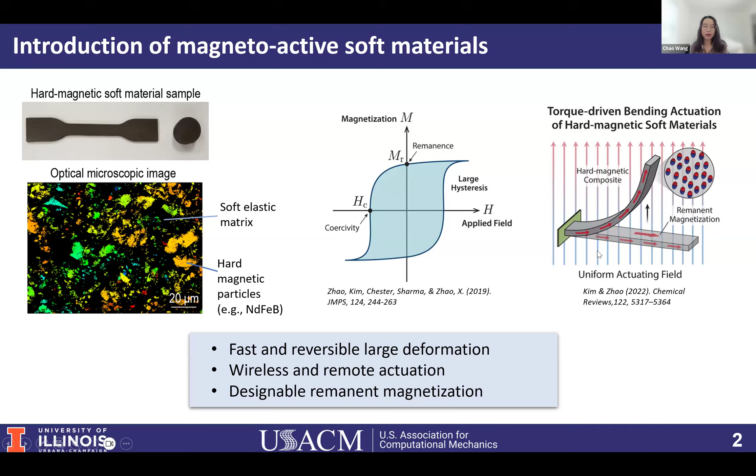Some advantages: first, it can have a very fast and reversible large deformation. Also, we can apply the magnetic field wirelessly. And lastly, the magnetization can allow us to design its distribution so that we can manipulate the mechanical response.

Because of those advantages, there are many interesting applications using this material. For example, as shown here, they designed some robots moving in a stomach model. In this work, they designed this robotic bar so it can navigate inside the vascular network to do some interesting tasks. And in this work, they designed some metamaterial for wave control applications.

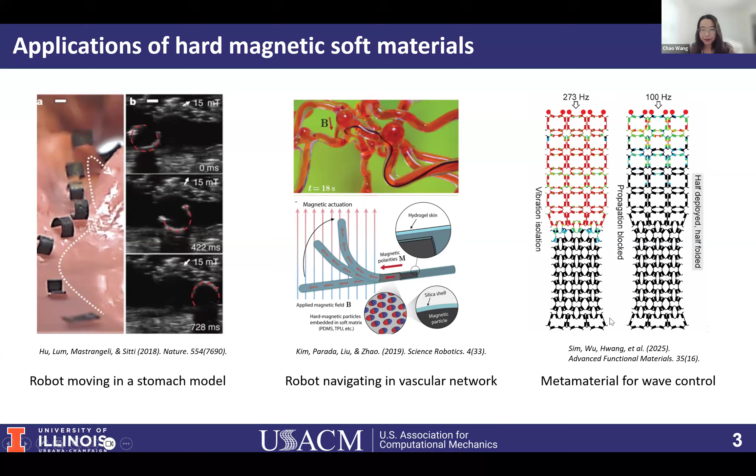Based on that, my research work is investigating a framework integrating design and advanced manufacturing methods to fabricate those designs. Finally, we are also investigating the potential applications using this fabricated design. In the next part of this talk, I will introduce them one by one.

So first, let's start with the modeling and design part. In terms of the modeling of this hard magnetic soft material, we adopted this simplified model published in JMPS in 2019. This model describes the Helmholtz free energy function in two parts.

The first part is the hyperelastic stored energy function to describe the nonlinear elastic property. And the second part is the magnetic free energy. So there are some key assumptions of this model: it assumes the material retains a remnant magnetization after saturation, and in the undeformed configuration, it assumes the magnetic flux density varies linearly with applied field. Lastly, the applied magnetic field is assumed to be uniform.

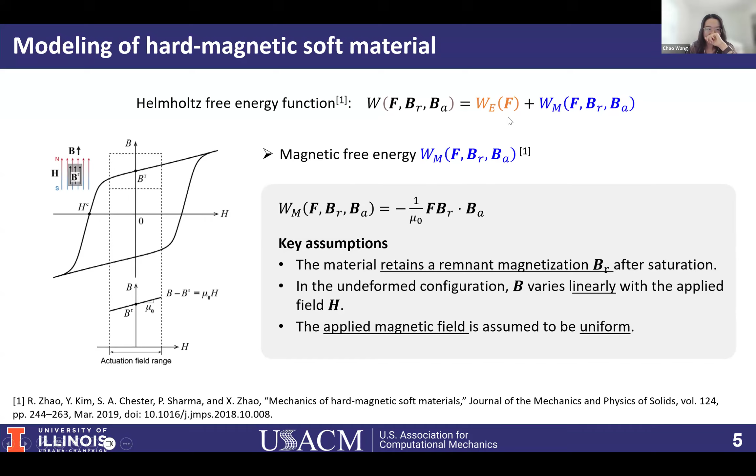Using this model allows us to deal with the high computational expense of topology optimization. In terms of the first part, the hyperelastic energy function, I'd like to point out that in the original model, they assume the material is homogeneous.

However, the material is essentially a two-phase material, including the rigid particle and the soft elastomer. To address this assumption, in our recently published work, we adopt an analytical homogenization-based model originally developed for filled elastomers, and we are investigating its application in the hard magnetic soft materials.

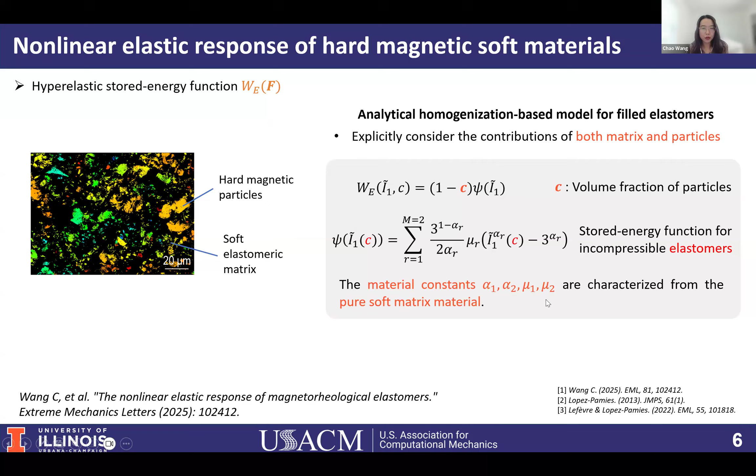Basically, in this model, it describes the energy function with respect to the volume fraction of the particles. The stored energy function can be for incompressible elastomers, and the material constants are characterized from the pure soft matrix material. So it explicitly considers the contribution of both the matrix and particles.

The key advantage of this model is that we can just use one-time characterization of the matrix material. It allows us to predict the mechanical response of the magnetic materials at any filler volume fractions.

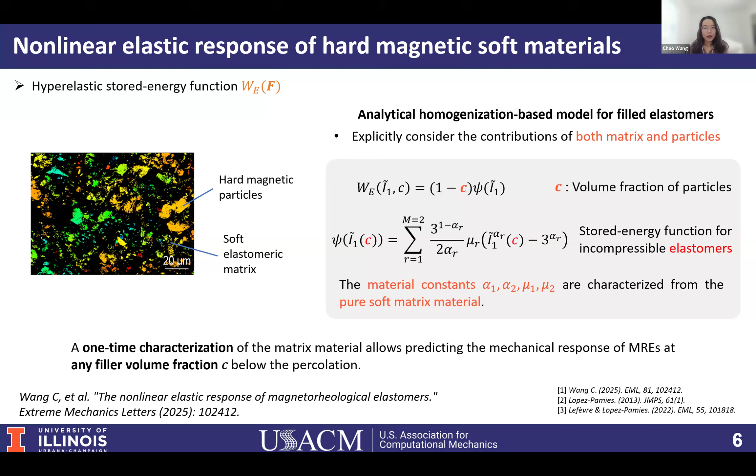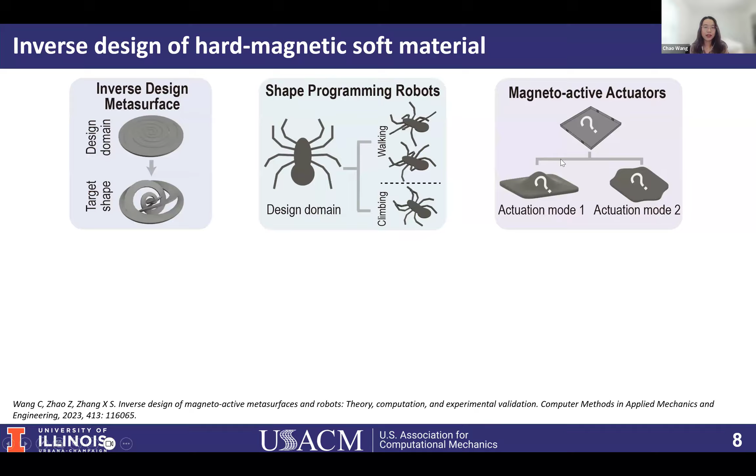Based on this model combined with the previously introduced magnetic potential energy, we use it for the inverse design of hard magnetic soft material. Here we consider different functionalities. For example, we can inverse design a metasurface to achieve different shapes, design a robot with different locomotions, or actuators with different actuation modes. To achieve that, we mainly use the topology optimization method, which finds the material distribution within a prescribed design domain to minimize a certain objective function under a set of constraints.

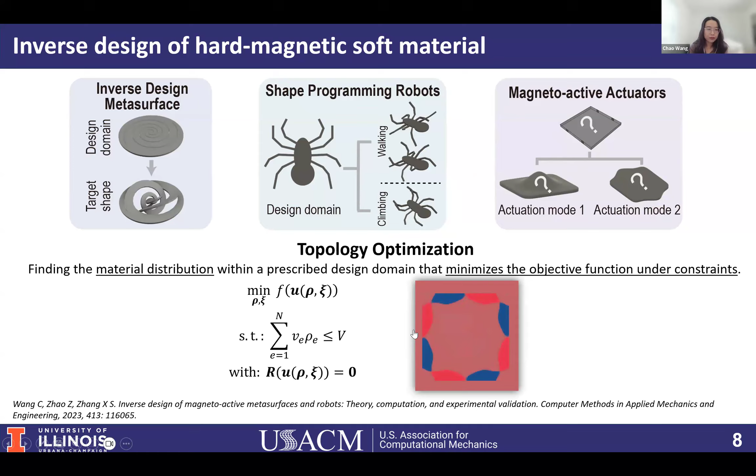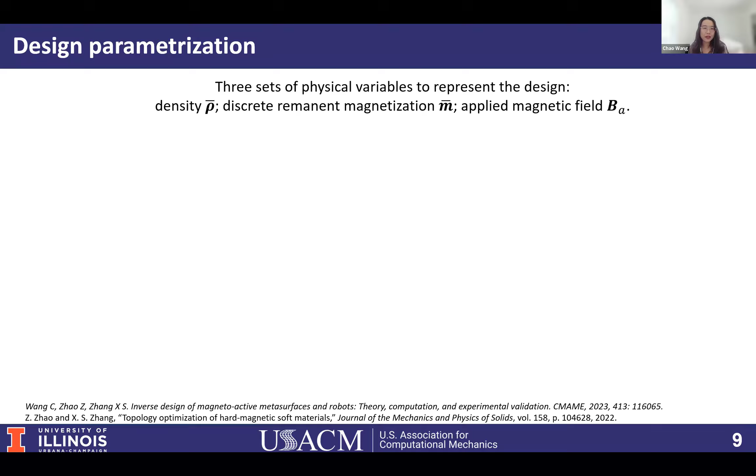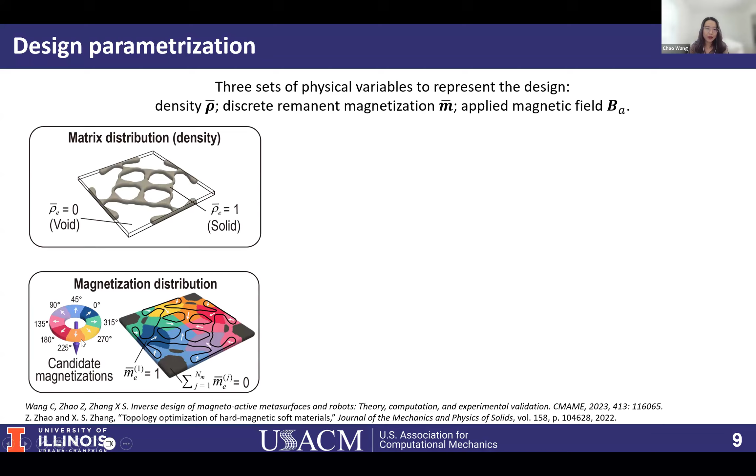Using topology optimization for this problem, we need to think about how to describe and parameterize the design. We use three sets of physical variables to represent the design. The first is the density variable, which represents whether there is material or not. The second is the magnetization distribution: we prescribe a set of candidate magnetization directions and optimize the direction at some location of the design. Lastly, we can also program the applied magnetic field, which is the external actuation. With these three sets of design variables, we form our final design and its corresponding response.

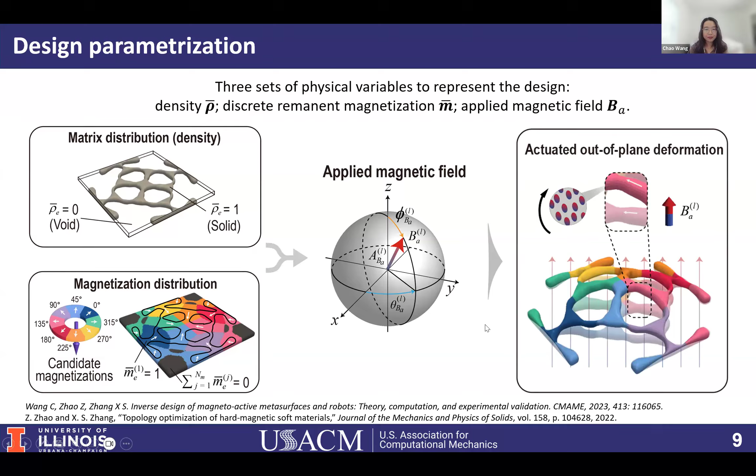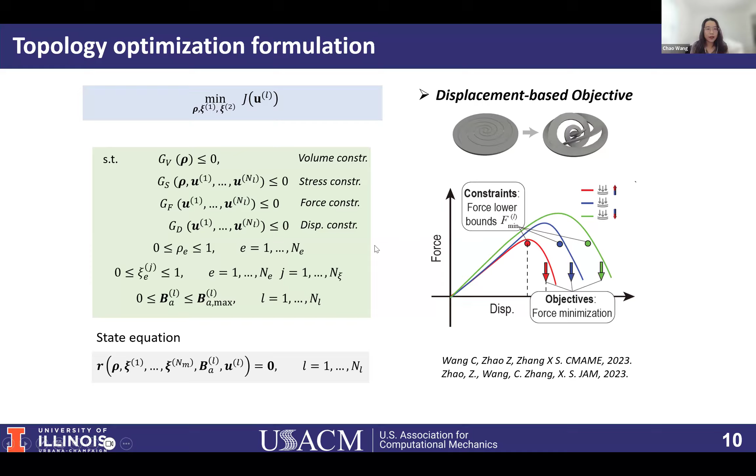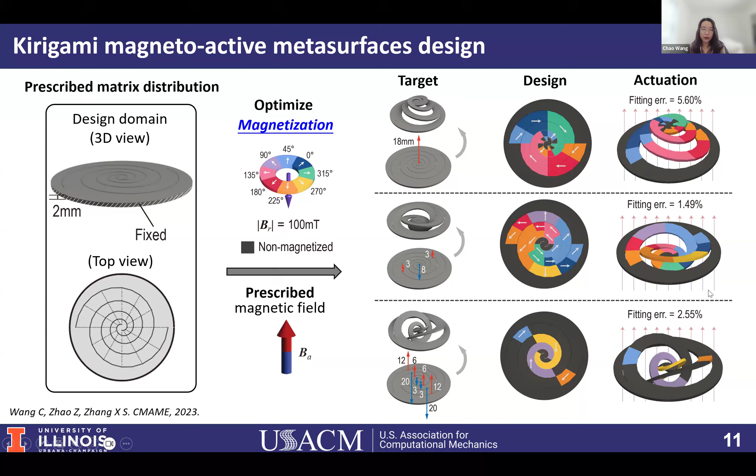With this design framework, I'll show some interesting designs we obtained. The first is the Kirigami Magneto-Active metasurface design. We prescribe this design domain, a very thin sheet with spiral cuts for the Kirigami. We optimize the magnetization distribution under a prescribed magnetic field and set a series of target deformations for different cases. Here is the corresponding optimized design, and here is the numerical result under our magnetic actuation. We can see it fits the target shape quite well with minimal error.

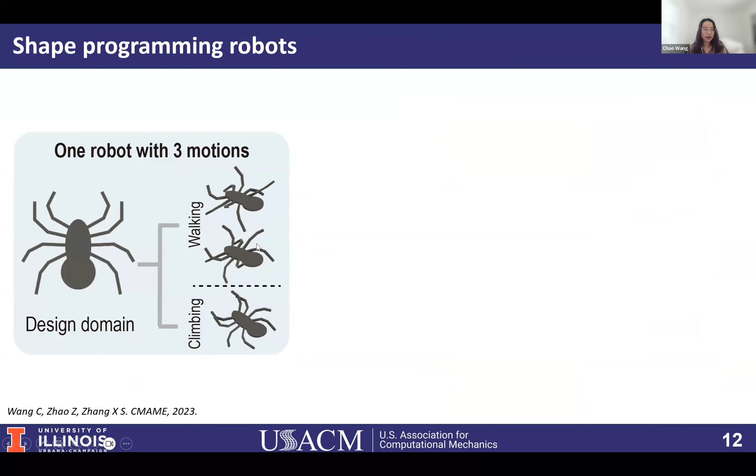In this example, we use this framework to design a spider-shaped robot. We specify this spider-shaped domain and set the target shape to be biomimetic motions like walking and climbing. We optimize the magnetization distribution as well as the external actuation, the magnetic field. This is our optimized design, and using this design with its corresponding magnetic field, we can see the numerical result actuated matches the targeting response we prescribed.

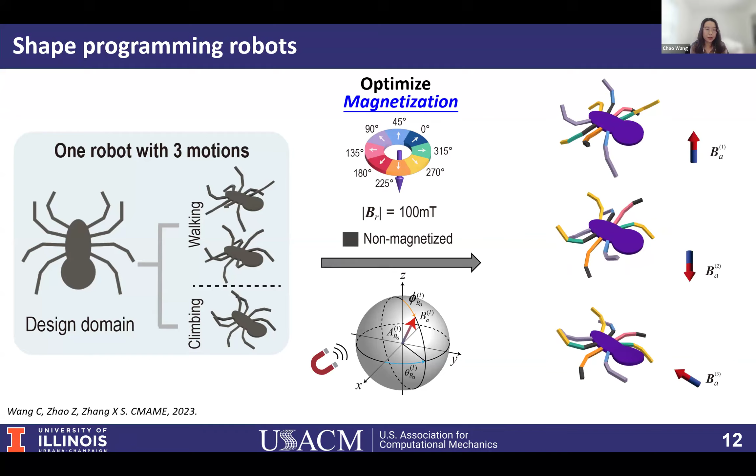Now, after having this optimized design, the question is how we can fabricate them. Next, I will introduce the manufacturing methods we have investigated, specifically focusing on two methods: the mold casting and assembling method, and the direct ink writing method.

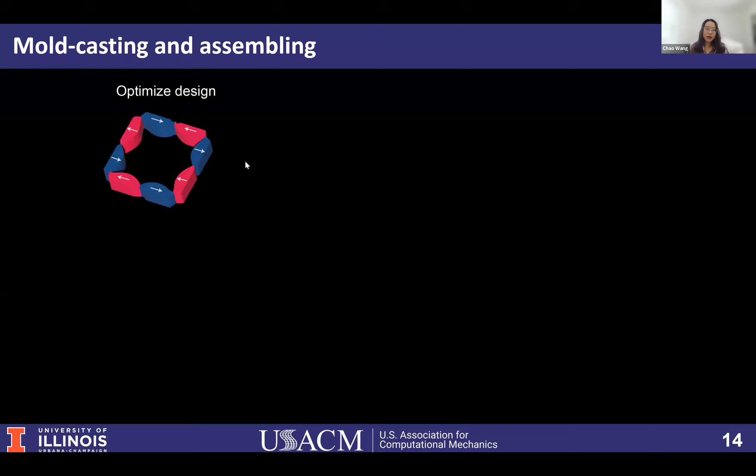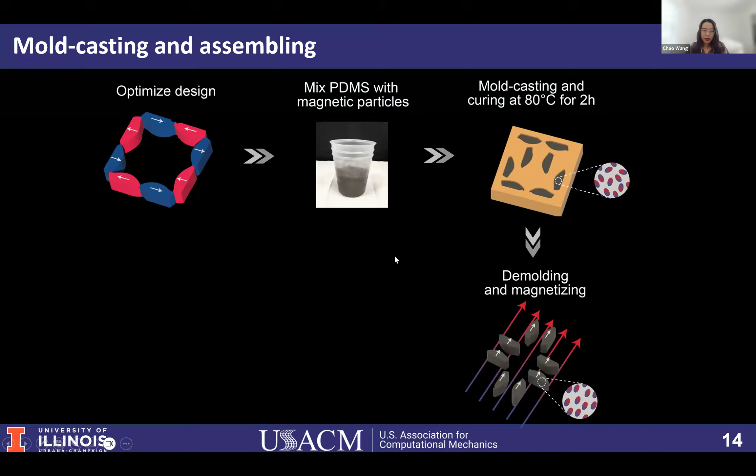The first method, mold casting and assembling, is a very straightforward approach. Given this optimized design, we first prepare the material ingredients, mixing the matrix and magnetic particles together, then 3D print the mold according to the geometry of the design. We pour the materials into this mold. At this stage, the embedded magnetic particles, those dipoles, are randomly oriented. After curing at high temperature, the material becomes solid, we take it out, and magnetize it using a very large impulse magnetic field to align those embedded particles into the target direction according to our optimized design. After magnetizing, we use another mold and put the magnetized members in and bond different parts, forming our final fabricated samples.

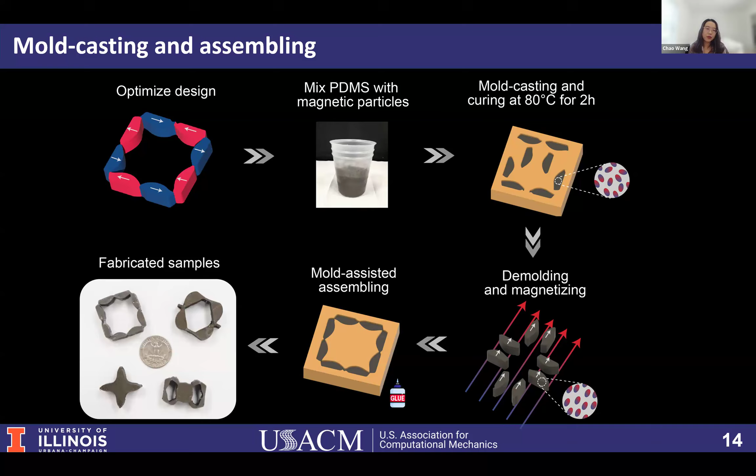This method is quite robust and straightforward. It can be used well for fabricating designs with discrete magnetizations. I'll show some examples we fabricated using this method. Here is the spider robot I previously introduced, fabricated using this mold casting method. We actuated it by applying the magnetic field, and we can see the experimental demonstration agrees well with the numerical result.

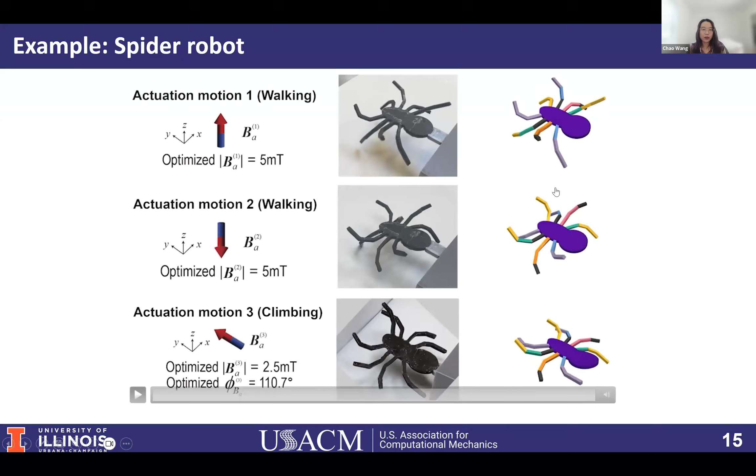Another method for fabrication is the direct ink writing method. Direct ink writing is a method that can enable the magnetization to align with the printing path. It was developed originally in 2018.

First, let me introduce the mechanism of direct ink writing of the hard magnetic soft material. We prepare the ink first, and then extrude it out under pressure, forming the structure layer by layer.

Some key characteristics of DIW: for the magnetic material, the ink is composed of magnetized hard magnetic particles and an elastomer matrix material. Originally, because it's in the liquid state, the dipoles are randomly oriented.

We attach a small magnet next to the printing tip, and that magnet generates a magnetic field at the tip. When the particles pass through this region, the magnetic field drives the particles to rotate and align in the same direction. Then when the particles drop off on the printing bed, the direction aligns with the printing direction.

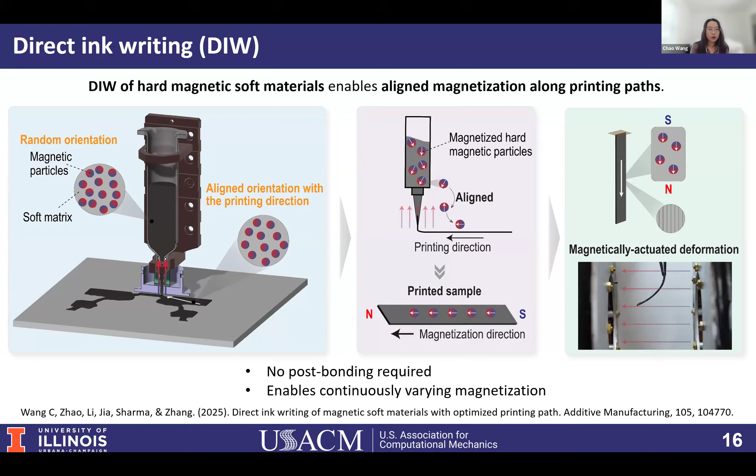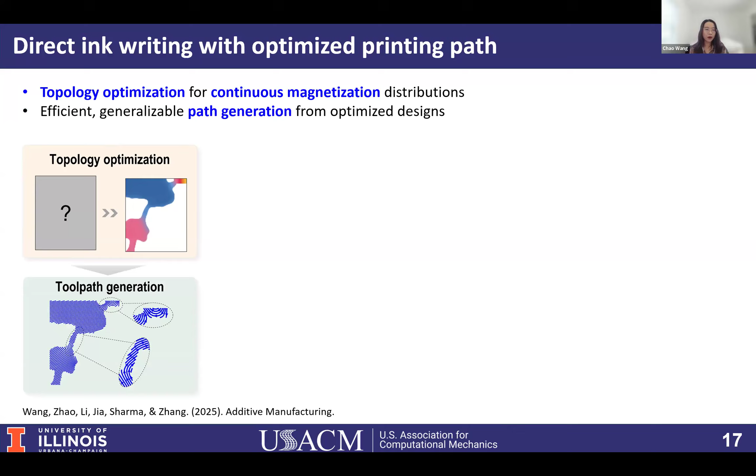Based on this method, to adapt our design with direct ink writing, we adopt the following strategies. First, we extend our topology optimization for continuous magnetization distribution, so the magnetization can vary in any direction. Second, we deal with path generation, how to generate the tool path aligned with our optimized magnetization direction. Finally, we fabricate those optimized designs using direct ink writing and did a series of experimental validation.

First, in the topology optimization part, we extend it to consider some DIW requirements. Compared with our previous work, where we prescribed a certain number of magnetization directions,

in this case we specify the magnetization direction to be oriented in any arbitrary direction. Also, the magnetization magnitude should be uniform because we cannot change the magnitude during printing. Lastly, we would like the structural members to be sufficiently large and well-defined.

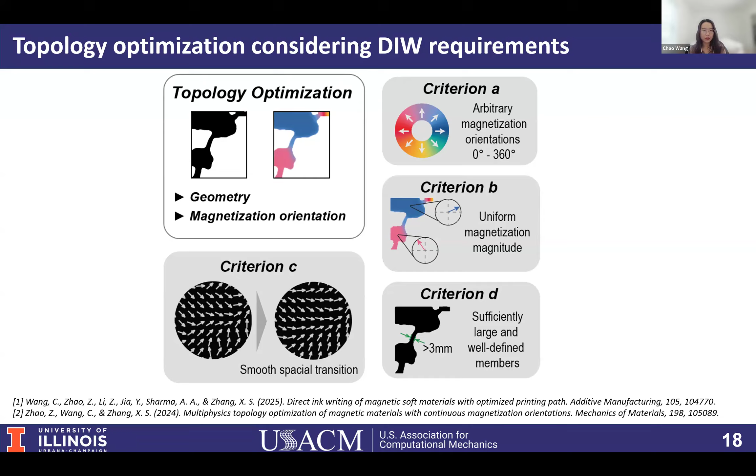Also for the magnetization direction, we would like it to transit smoothly so the printing goes smoothly. By incorporating those requirements into our topology optimization framework, we can get designs with continuously changing magnetization.

Based on the optimized design, we move forward to the second purpose: aligning our printing path with the optimized magnetization direction while preserving the optimized geometry. To solve this problem, we use global parameterization.

We define an orientation energy, and try to find a scalar field whose contour lines align with the direction of the target magnetization. After doing that, we can use the contour lines as our printing path.

Given this optimized design and corresponding magnetization, we first rotate the magnetization vectors by 90 degrees, then solve this scalar field by making its gradient align with this rotated magnetization direction. After having this scalar field, we can extract its contour lines as our printing path.

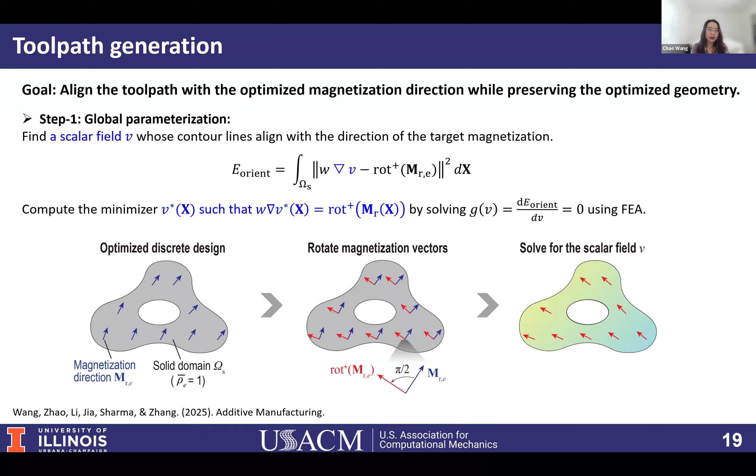That's what we did in the next step: we extract the contour line coordinates, which also introduces some redundant regions that we can further remove. Also, because the contour line can be bidirectional but the magnetization has just one unique direction, we need to identify the target direction.

We compare the cosine similarity and adjust the sequence of the coordinates of the line segments to make it align with the targeted magnetization.

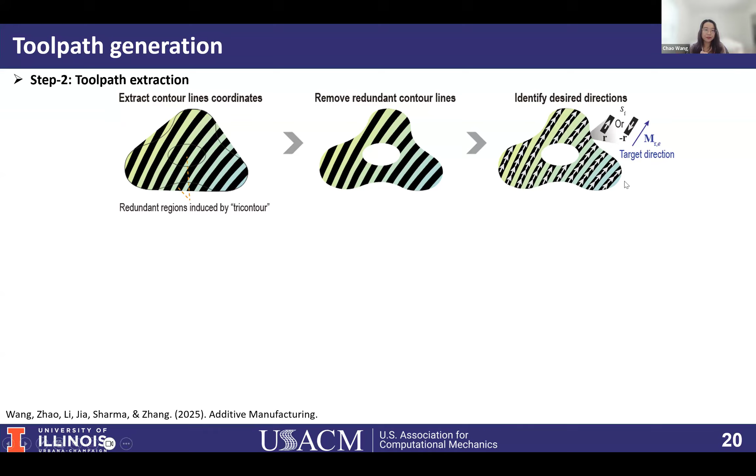Finally, we have different post-processing procedures. For example, we can remove toolpaths with extremely short length, and adjust the resolution to make it efficient for storage. We can also sort the printing sequence of those lines.

In this case, we prefer the next lines to print next to the last printed filament. In the end, we convert those line coordinates into a printing format compatible with the printer.

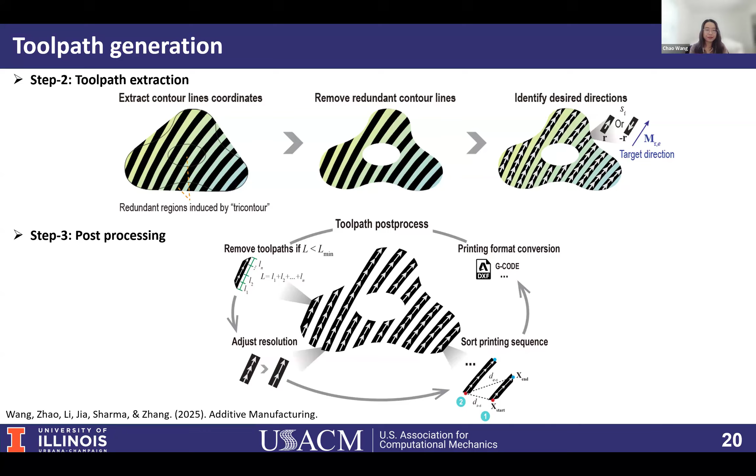So after having the design and the printing path, I'd like to introduce some examples we have achieved.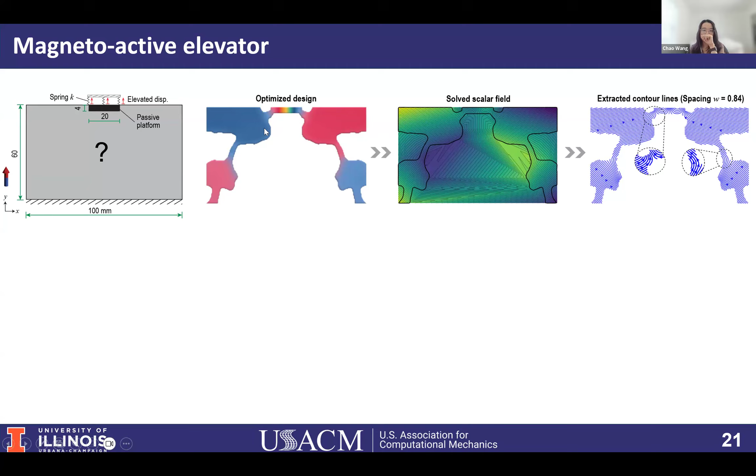This shows our solved scalar field, and its contour lines align with the optimized magnetization direction. Using this printing path, we start with direct ink writing, showing one of our printing processes. After curing the material, we also did experimental validation. This shows the deformed state. We apply the magnetic field, so we can see it can lift this central part as designed.

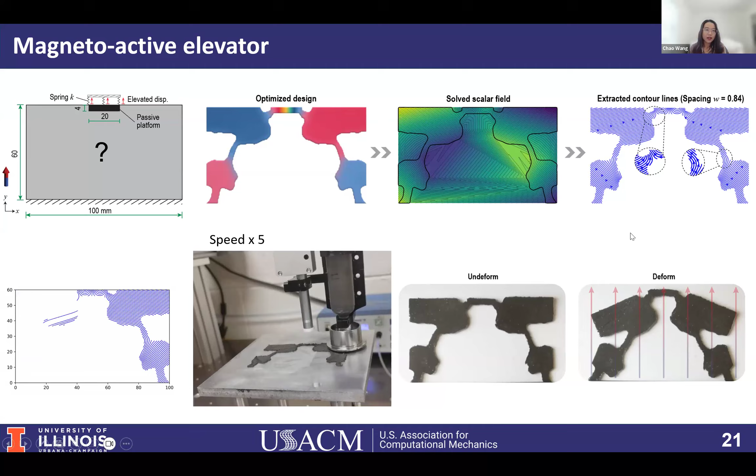The second example is another butterfly-shaped metasurface. In this example, we use a very complex design domain with many inner holes. In this case, we try to optimize the magnetization orientation to achieve different shapes, for example, the flying, alternating, and warping shape.

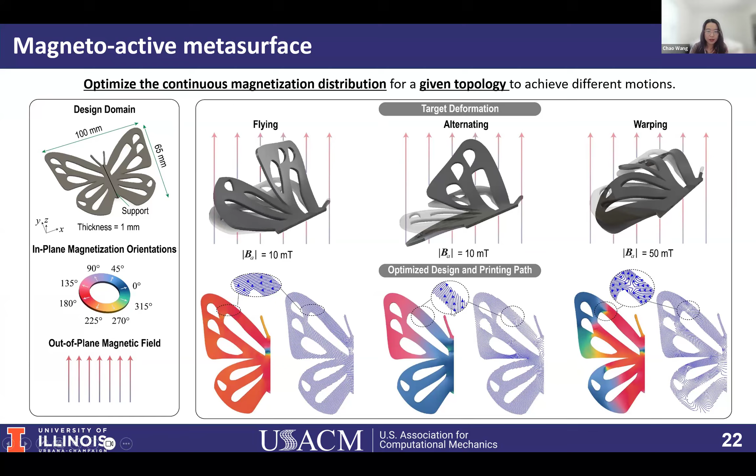In this case, we use a half-domain design, mainly to reduce the time cost in the topology optimization. Finally, we got this optimized design for each case and its corresponding generated printing path. We can see those printing paths indeed vary continuously.

Based on that, I'd like to show a close comparison with the printed sample and our printing path. We can see those printed filaments actually can be printed quite well, following our generated printing path. In this case, because we designed them...

using one symmetric half, to get the entire structure we print them one by one and then bond them together. But I like to point out that we can also design them as a whole structure, and then print them as the entire structure.

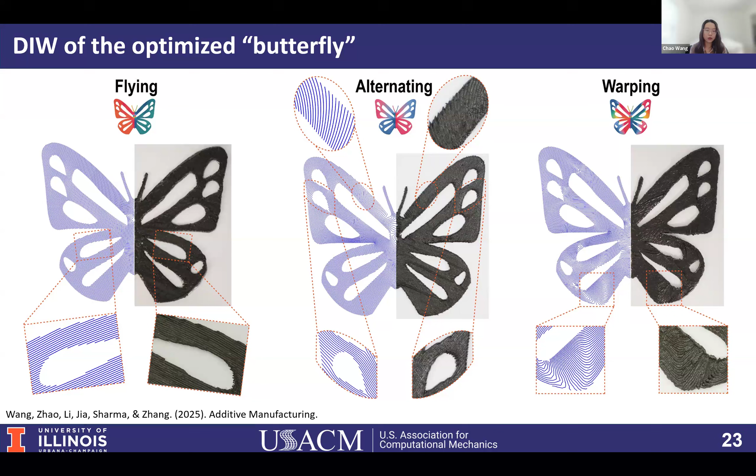Using this butterfly design, we also did experimental validation, and this is a photo showing our printed sample. We apply the magnetic field, and this shows a comparison of our numerical design and our experimental design. It can be seen the deformed shape matches quite well with our numerical prediction.

In this example, we show that we can use the same design domain, but by slicing the same topology into distinct printing paths, we can make it have different morphed shapes.

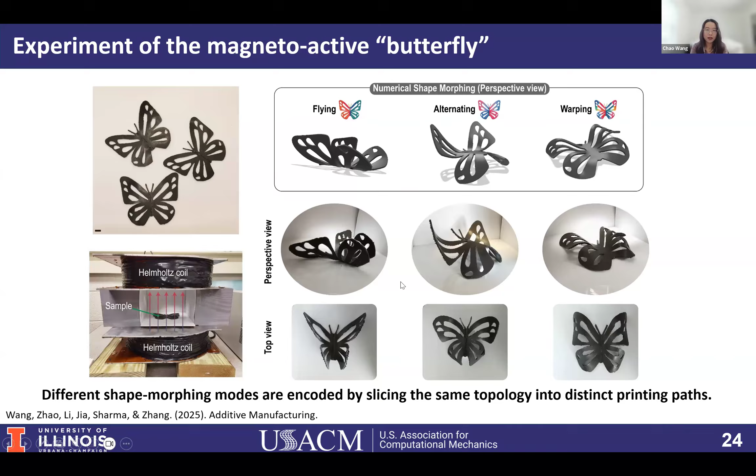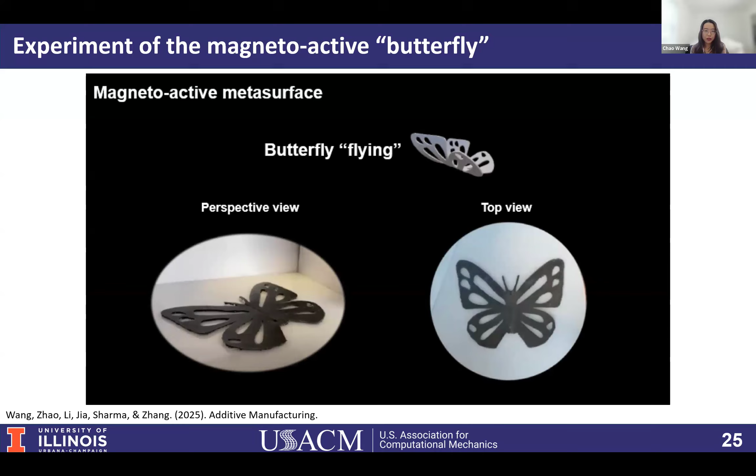I like to play the video for this experimental validation. The magnetic actuation is generated using the Helmholtz coil. We can see the deformation is quite fast and is reversible.

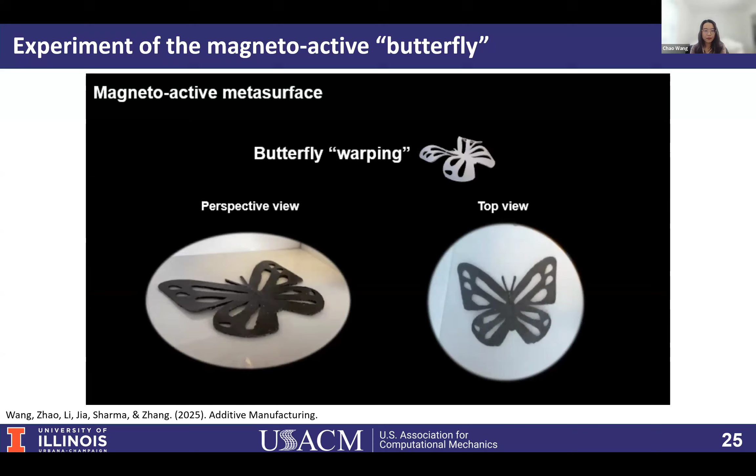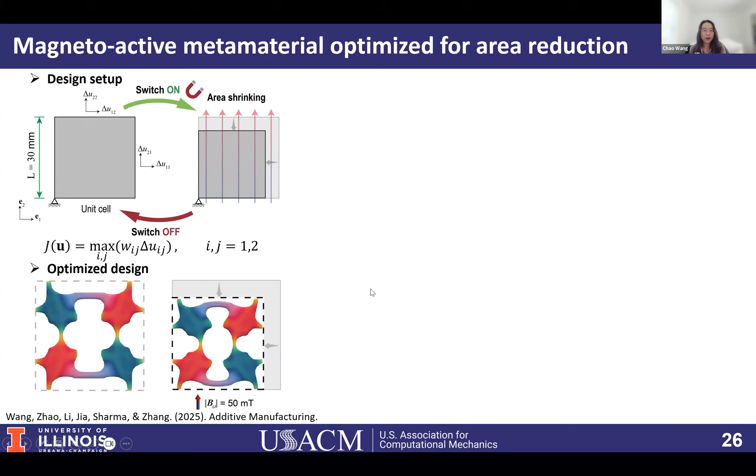Then we can assemble the structure and use the assembled structure to generate the printing path at one shot. As we can observe, between different unit cells, those printing paths can transit very smoothly, and can be generated very efficiently.

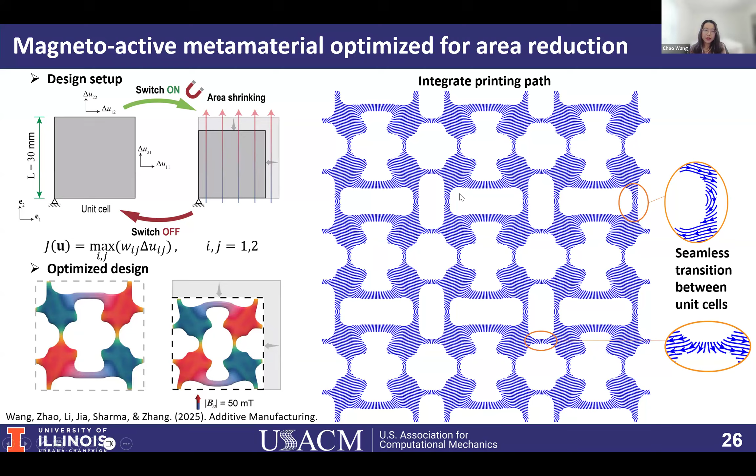With this assembled structure printing path, we did the experiment. This shows the comparison with our numerical result: the undeformed state, and under the actuation, it will deform to achieve the area reduction. Here is a video showing the actuation process.

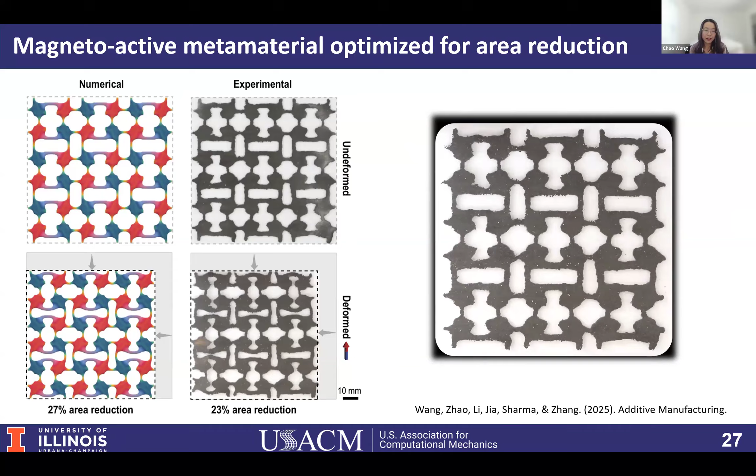That concludes the story of our manufacturing strategies. Basically, we have two different approaches: mold casting is suitable for discrete magnetization design, and direct ink writing enables continuous magnetization design. Lastly, based on the fabricated design, we are trying to see where we can apply those designs for real-world application.

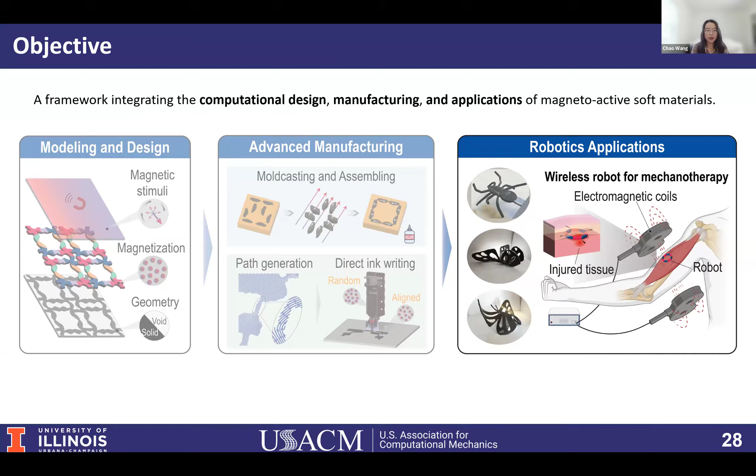In my recent work, we are mainly focusing on the topic of mechanotherapy. Basically, we are using the generated design to implant into tissue for mechanotherapy purposes. First, I'd like to introduce the mechanotherapy background.

Mechanotherapy is the application of mechanical force to injured tissues. Some recent studies show that applying this mechanical force can promote tissue recovery and regeneration. But some limitations in current methods are that mechanotherapy devices typically find it very hard to reach deep tissue, and also cannot control the exact tissue deformation.

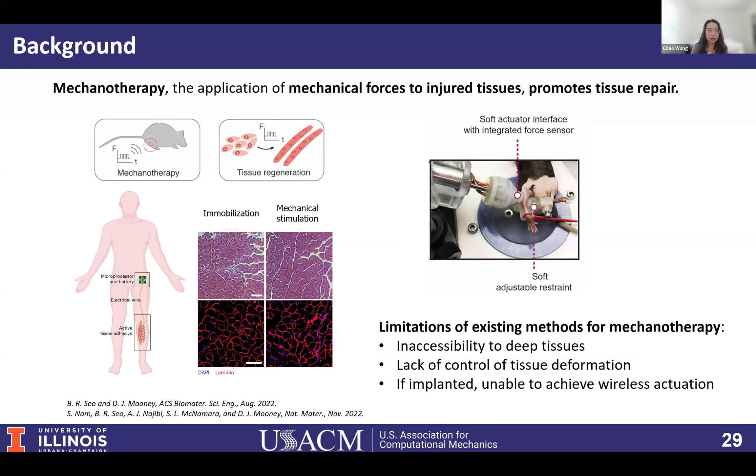Lastly, for example, in this work, they developed an implantable robot. By implantation, it has to be connected to some wire for actuation. But for the Magneto-Active soft robot, because the magnetic field can be applied remotely, that enables wireless actuation.

In our work, we are focusing on using the designs to generate wirelessly controlled tissue deformation for mechanotherapy purposes. Basically, we can implant this robot into deep tissue and apply the magnetic field externally, so it doesn't have to be connected to any wires, and it's effective for deep tissue by implantation.

Because we can also use the topology optimization framework to inverse design the robot to achieve different target tissue deformations, that makes our design—the tissue deformation—programmable and controllable.

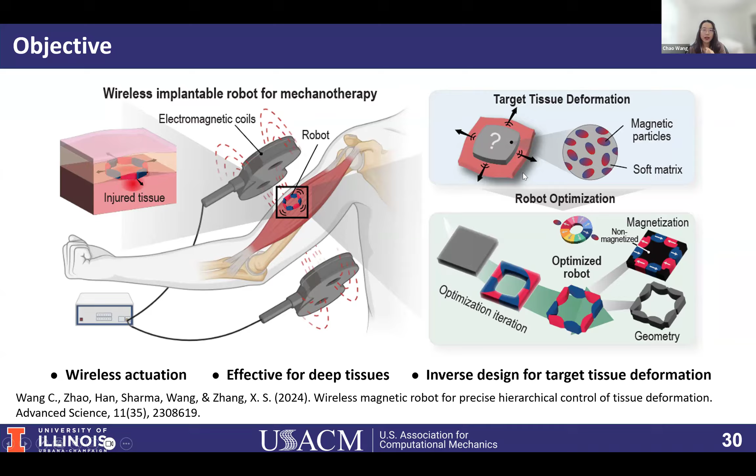In this study, in the topology optimization, we basically consider the modeling of both the tissue and the robot. As shown here, this gray region represents the robot design region, and this red region represents the design of the underneath tissue.

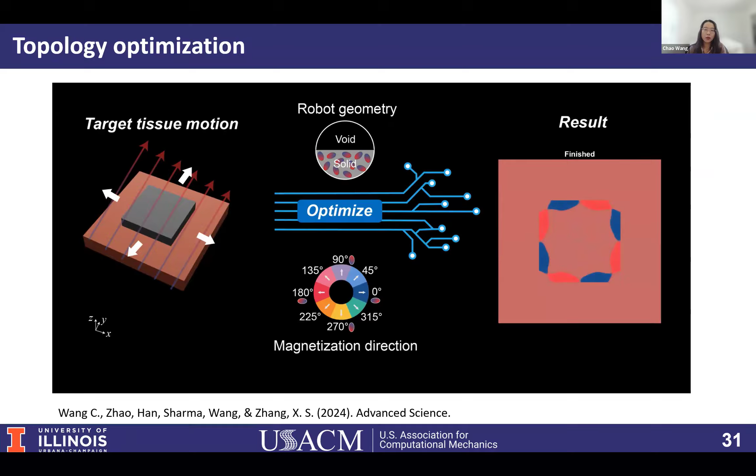So this video shows the optimization process. Basically, we can specify a target tissue deformation, and then we can optimize the robot geometry as well as the magnetization distribution to achieve this target tissue deformation. By modeling the tissue and the robot, as well as their interaction, we can get our optimized design as shown here.

Next, I will show some examples that we achieved using this hierarchical modeling and topology optimization.

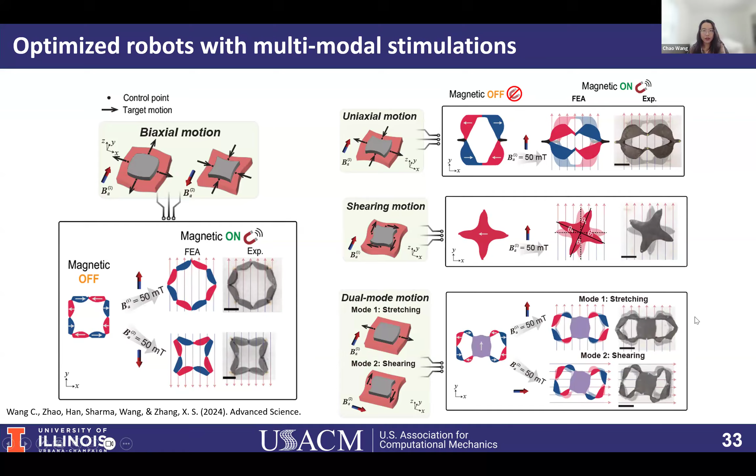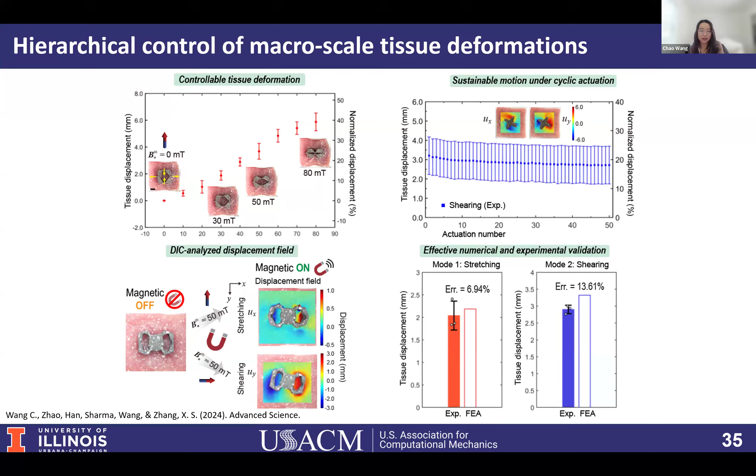So that will conclude my talk today. Basically, my work is mainly on the framework for magneto-active soft material. For the modeling part, we integrate a framework for rapid prediction of the nonlinear elastic response of magneto-active materials, supported by systematic experimental validation. In terms of design, we developed a topology optimization framework for optimizing the discrete magnetization distribution, as well as the external actuation magnetic field, to achieve three-dimensional displacement control.

For manufacturing, we use different approaches to fabricate our optimized design: the mold casting method and the direct ink writing method, together with a path generation algorithm. Finally, we also investigate a biomedical application of this optimized robot for controlled tissue motion, with our in vivo validation currently ongoing.

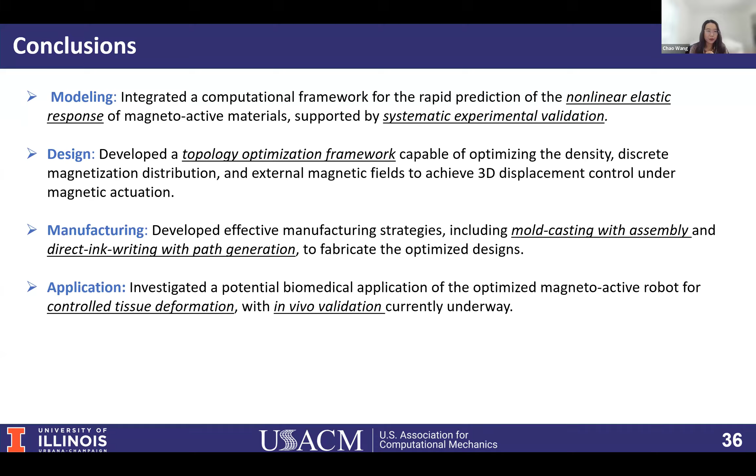Here is a summary of the related publications for this talk, and all the work has been completed within the Mission Lab at UIUC. I also acknowledge the financial support from DARPA and the NSF agency. Thank you everyone for listening, and I'd like to take any questions if you have.

Hi, Chao, thank you so much for your impactful research. Does anyone have any questions?

Hi Chao, this is Shenhu. Yeah, very great presentation, very fascinating topic.

I have one question about the direct ink writing technique, because you change the material from liquid to solid. Do you expect any viscous properties in your material, or do you think it's just pure elastic?

That's a good question. So actually for the direct ink writing part, the material during printing, because it's still liquid, the viscoelastic property is a critical factor we need to consider during printing. So we also characterize the viscoelastic property of the material ink. But after printing, we cure the material to be solid. In the solid state, once we apply the magnetic field, it can still deform hyperelastically. So in this study, during the actuation, we didn't consider the viscoelastic property, but it would be critical to consider during the printing stage.

Does that answer your question, Shen? Oh yes, thank you. I also have a follow-up question.

In your equations used for the hyperelastic free energies, do you think there is no deformation with those magnetic particles?

That's another good question. So basically in this model we are using a stretch-based model. So the particles, we neglect the rotation, it's stretch-based and we assume the particle to be rigid. But for more accurate modeling we should also consider the rotating of those particles, and there are also some advanced modeling and fully coupled modeling developed for this fully coupled problem. Here we use this simplified model mainly for reducing the computational cost in the topology optimization.

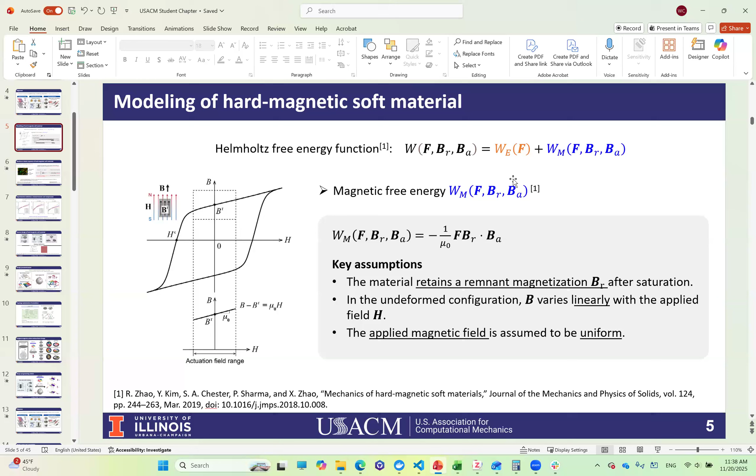The first one is about your DIW 3D printing experiments. Were you guys able to visualize whether or not those rigid magnetic particles are really aligned along the printing path, 100% aligned or 90% aligned or something?

Were you guys able to quantify how much alignment there was after printing? And the second question is about your optimization scheme. Would you mind elaborating a bit more about how you were able to do the optimization considering this is a target optimized design, and how you were able to achieve that target optimized design? How was the computational cost?

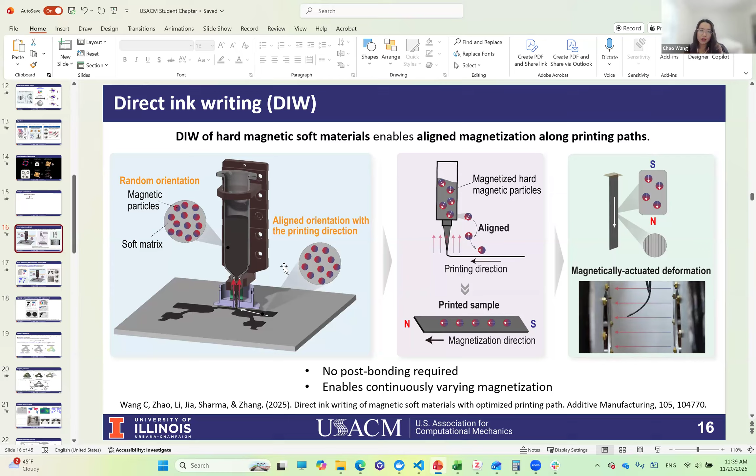Thank you so much for the questions. Regarding your first question, that's a very important point. A straightforward way to visualize the particle alignment - we are also trying to see if we can use some microscopic image to visualize it. But as shown in my previous figure, although this is not used for the DIW, the particle shape is quite random, and it's very hard to visualize if it's aligned or not.

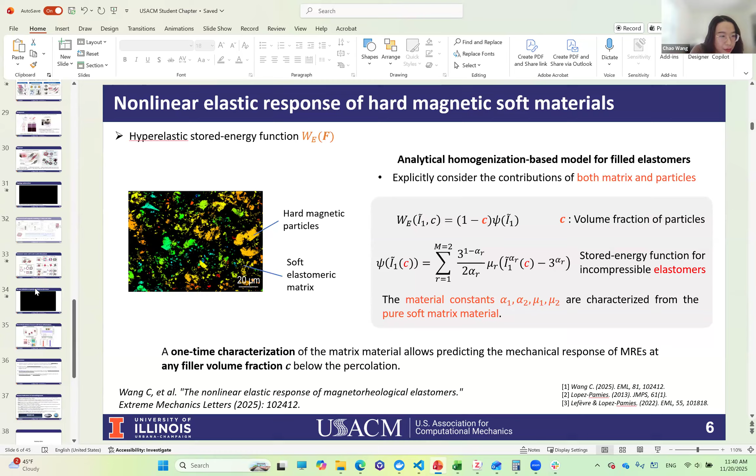So to quantify the alignment, what we did is compare the remnant magnetization. We can measure the magnetic flux density of the printing samples. For example, for a fully magnetized sample, we magnetize the solid and measure the magnetic flux density, giving us an ideal value - the maximum magnetic flux density we can achieve without DIW. Then we use our DIW to print a filament, cure that filament, and measure the magnetic flux density of that printed filament. By comparing these two values, we can somehow quantify the reduction or alignment during the DIW.

Based on our measurement, it's found out that by using the DIW, the generated magnetic flux density will be around 60% compared with the maximum value. So that can, to some extent, reflect if the particles are aligned or not.

Thank you. So it's like based on that, your alignment is about 60%, roughly. Yes. Okay, thank you. And in terms of the topology optimization method...

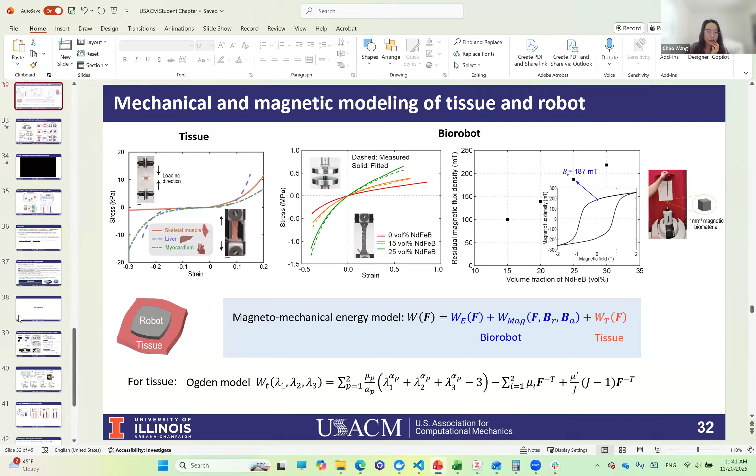The constraint will be, for example, the volume constraint - the percentage of material we are going to use - and also the stress constraint to avoid thin members occurring. We also use filtering to have well-defined members, and the Heaviside function to promote discreteness of the design. In each optimization iteration we solve the nonlinear FEA problem, and it will minimize the objective until converging. So that is the overall story of the topology optimization.

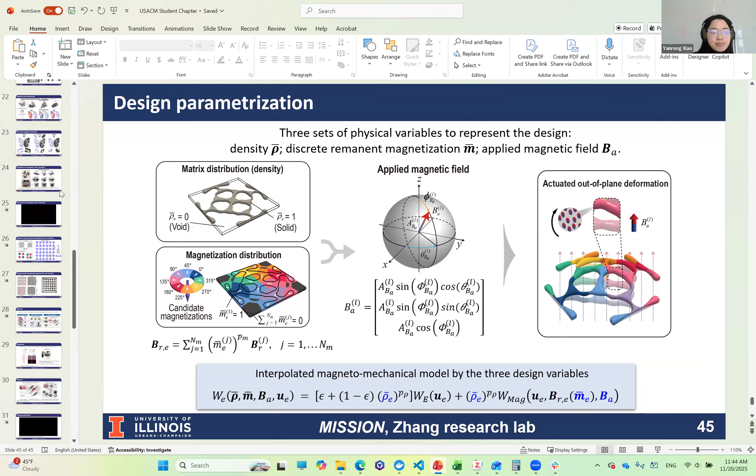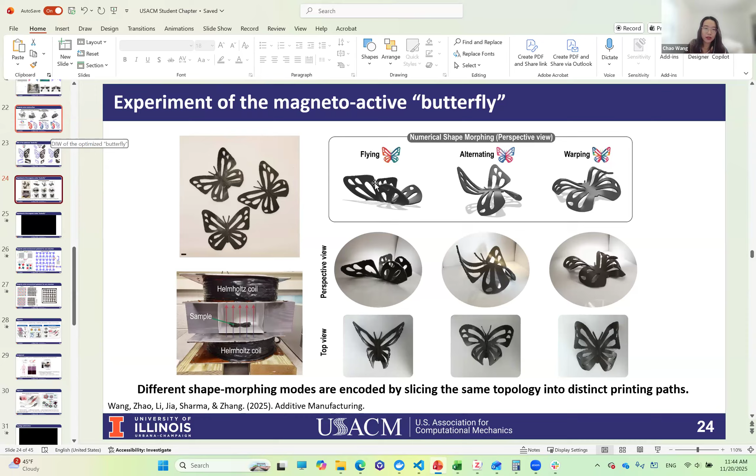Thank you for the question. For this butterfly shape design, we actually use maximization, so basically we are maximizing the displacement at some points. The objective function is maximizing the displacement at those regions, and the result we achieved is one optimum solution trying to maximize the displacement.

But it's also limited because here we didn't enable optimization of the density. If we also enable the optimization of the density, it will further increase the achievable displacement. But we can also use a fitting type, for example prescribing the displacement we want to achieve. That is also another objective we can have.

I see, thank you. I have another question. Because all those magnetizations may be along different directions, could this material maintain those magnetizations permanently?

Yeah, that's a good question. Based on our experience and also some studies from the literature, the magnetization can indeed decay as time goes by, but it's a very slow decay, and the decaying is quite negligible compared to the fresh value after magnetizing. For all those studies, we typically did experiments after fabrication within a month, and after a month it can still have a very large deformation.